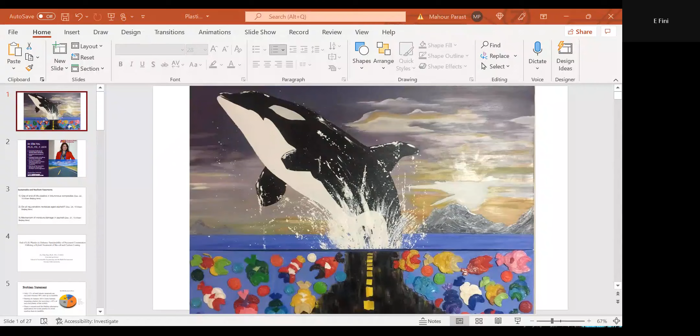I want to talk to you about, as Ali mentioned, waste plastics, what we call waste plastic, and why do we even care about them. So I'm going to start with this art, sort of cover art. It is actually painted by my sister, Elva, who was inspired when she saw all the problems with the plastics in America and everywhere in the world, really.

During this lecture, I'm going to ask a few questions, and I want you to think about it and maybe write your answer in the chat box. So this is not a typical seminar where you listen and, you know, sort of forget about it after a few weeks. I want you to reflect and think about what are the challenges in today's pavement and transportation in general, and as a student, if you are listening, what can be your contribution to address those challenges, whether it's in China or in America or anywhere else in the world. You can make a major impact by realizing and recognizing true big challenges.

So if you think about this art, it is actually showing how this whale is running away, and it's sort of ironic because whales don't have anywhere to go. So imagine if he's running away from the ocean, in a way it means he's gonna die because there is no other place for him except oceans.

And all those little plastics you see there, they are actually representing the plastics that we humans are dumping into the ocean. By 2025, it's estimated that the amount of plastic in the oceans will be equal to the weight of fish. And by 2050, we'll have more plastic than fish.

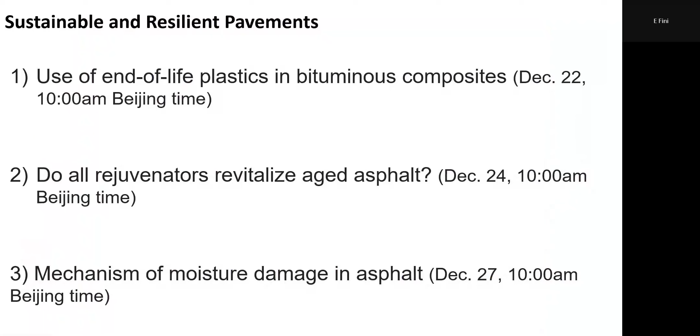So talking about end-of-life plastics, the word is plastics, right? So many of you think of plastics as one entity, but just like humans, like my name is Ellie and Ali's name is Ali, we are different. Plastics are also different. So when you hear plastic, don't generalize them, because every one of them has different characteristics. And I'm going to show you how we deal with them as end-of-life or waste plastic, and is it even possible to use them in pavement?

Here we talk about hybrid coating and some technologies to make plastic like asphalt and go and stay in asphalt. So I'll tell you about the technical side. But to start, think about all the waste plastic that goes to landfill. Right now, we are only recycling 12%, and 40% goes to landfill.

As you guys already know, China is not accepting plastic from America, and you guys are producing a lot of plastic on your own as well. So you end up with a lot of plastic on your side, and we are ending up with a lot of plastic on our side we have to deal with. There is a big need to find alternative solutions, because everybody's talking about this problem and the ocean and the fish dying and the whales dying.

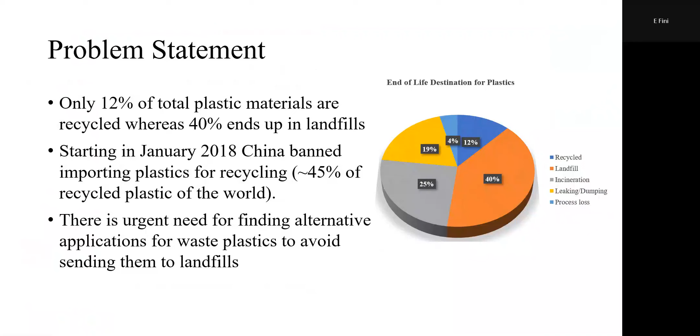But think about it from the material side as well. These are valuable materials. They are made of molecules. These are just called waste because they are in the wrong place at the wrong time. But when you look at it from a material perspective, these are just molecules like any other thing. When you throw out your bottle of water or milk jug after it's finished, it becomes waste. But these are literally polymers and molecules that a lot of energy and effort went into making.

And then you think, okay, I want to recover these molecules. I don't want to dump it in the landfill. Well, some of them are easier to recycle, so not too much energy goes into recovering the monomer.

And I caution every one of you in pavement and transportation, think about how we can improve our roads. Obviously, roads are not the cemetery or burial for waste. We don't want to just dump it into roads because we want to get rid of it. If it has value and if it adds value to pavement, then yes. If it doesn't, we don't want it. First and foremost, we are engineers, we are pavement engineers. We want to make the road last longer, be more sustainable, and work better.

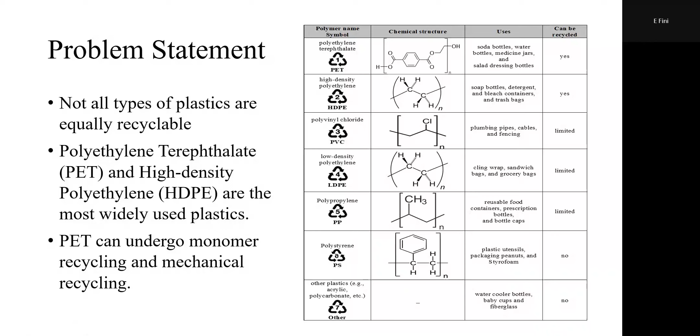By saying kick them out or push them away, I mean compatibility. So when you think about plastic and use of it in asphalt, you have to think about, are they compatible? What is the problem if they don't like each other? They're gonna separate. Over time, they're gonna separate and you're gonna have pavement which is prone to crack because now you are getting phase separation. So I'm gonna show you how we can actually make asphalt and some of this plastic like each other. And this is one method we have done.

I'm sure many other people are working on other methods, but one step is obviously to try to recover monomer, but that's too much energy and it's difficult in terms of carbon footprint and associated energy consumption. So we decided instead of recovering the monomer, we're gonna grind the plastic and then cover its face so the bitumen thinks it's his friend and is compatible. So here is the covering portion, it's coating. Basically, we are covering the plastic's face. You can see these colorful granules, they are different plastics. We grind them to this fine powder here, and then we use the oil to coat the surface.

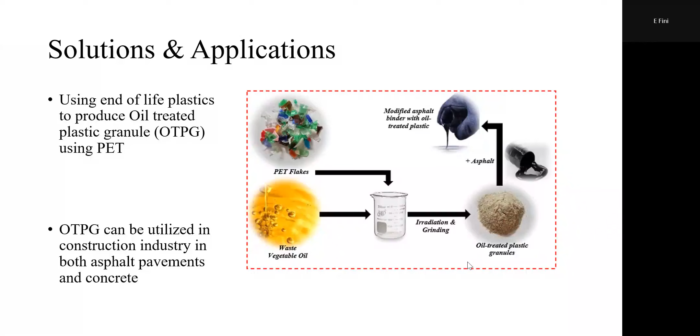You may think why we are coating it with waste vegetable oil. In waste vegetable oil and many other bio oils, we have molecules that can graft or attach to the surface of plastic. So now you have a plastic that doesn't call itself plastic. So then asphalt may like it because it doesn't see that much incompatibility. So we call this oil-treated plastic granules, and that's how it's made. It's a patent pending technology here at Arizona State University, and we're trying to use it in trial road sections here. So thinking about the method, here you can see different pictures of it.

So I'm going to tell you about the tools, but before going to the tools, because some of you are students, I assume, when you face a challenge or you want to start dealing with a big problem, don't worry about the tools. You need to first figure out your research hypothesis, and figure out the true problem, which, in other words, we call the research gap.

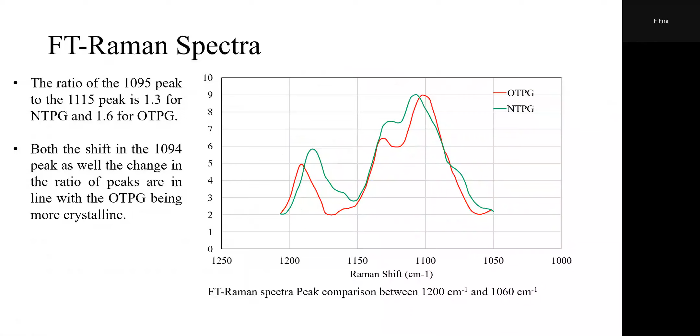So we did another tool here. This one is Raman. So when we run FT-Raman here, the ratio, for all the oil treated, is 1.6. That right there tells you the two of them are different. So two methods to show you that what you have done in terms of changing the phase of plastic worked, even though the color stayed the same.

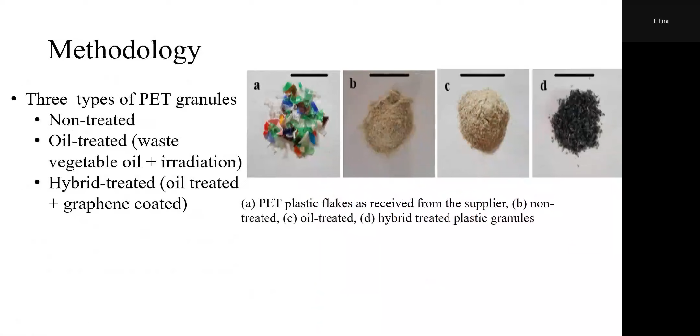So you can see how important it is now, after you know the question, to pick the right tool. But they are still just a tool. If one tool, one method did not work, like here, color did not distinguish, I go with another method. If this one doesn't work, then I go with another method. For now, we have two methods that can distinguish. Good. The next question is, okay, now I see that surface chemistry changed. I have new chemical functional groups appear on the surface after I treated it. Does it mean the surface energy also changed?

So this is right here another tool. We use inverse gas chromatography, and with that, we measure basically surface energy. The non-treated one here had, in terms of dispersive forces, 91 millijoules per square meter. As soon as we treated it, it became 142. So you can see the change in dispersive forces, and of course it reflects in the total, which is increased.

The increase of surface energy promotes interaction with surrounding material. In this case, we're gonna put plastic into bitumen. So increase of surface energy of our new plastic helps it interact with its surrounding, which is bitumen. That's the hypothesis, right? If I increase the surface energy, I grafted this molecule, I'm expecting that the interaction will go up.

The whole reason we wanted to make it compatible, right, to begin with, is we want the interaction to be higher. So in this case, when we went from 91 to 142, that's a significant increase in surface energy. Now we want to know: does it really interact better with its surroundings now that we changed the surface? So with these three tests, we proved that what we did changed the surface, changed the plastic, even though the color did not change. So now let's see if it helps.

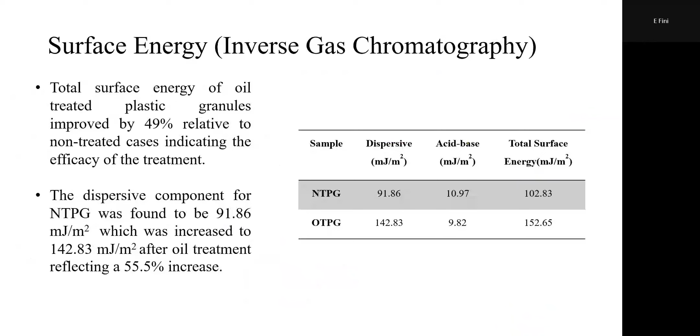And then all these other tests are more or less specification driven. That's why I put ASTM in case you want to do it on your side. So ASTM D4402 is a viscosity test. Most of you are familiar with this. When you add new particles or granules into asphalt, what happens? Viscosity jumps up. In the standard, we only look at the 135 degrees C viscosity. So viscosity at 135 for non-treated was around 2000, and then oil treated and carbon treated were these two bars. So we did reduce the viscosity a bit, but interestingly enough, it shows that with the carbon treatment, it was higher than just oil treated, which may even mean that the interaction on the carbon side was more, because carbon is literally more compatible with bitumen, which itself is carbon based.

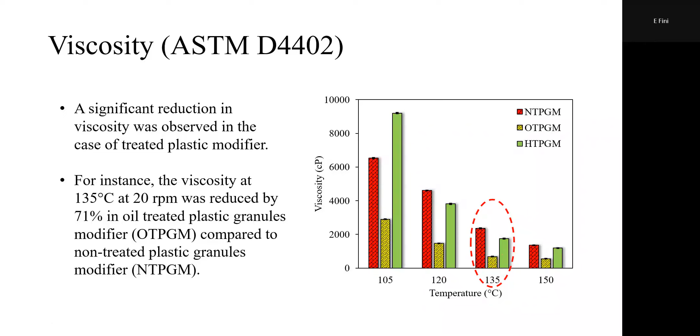Another method to show these materials are different is rheology, or modulus. For those of you not familiar with complex modulus, G star is a measure of resistance to shear. You basically shear the samples using a parallel plate spindle at a certain frequency, and you measure how much resistance it gives to that movement. Here you can see the neat asphalt is the blue here. Neat asphalt, no plastic at all, was right here. As soon as we added each one of these plastics, it jumps up as expected. Think of adding granules or powder into the bitumen, which is liquid. So it becomes stiffer, higher modulus, more resistance to shear.

And in this case, the non-treated one was actually higher resistance right here. When we increased the compatibility, the movement was better. You can see here, the interaction was better, the relative movement was better as well. But that's another test to show you that these three samples are different. They are the exact same grinding size, so particle sizes are exactly the same. The material is coming from exactly the same batch, same plastic, but just by changing the surface properties, you can change the modulus this much.

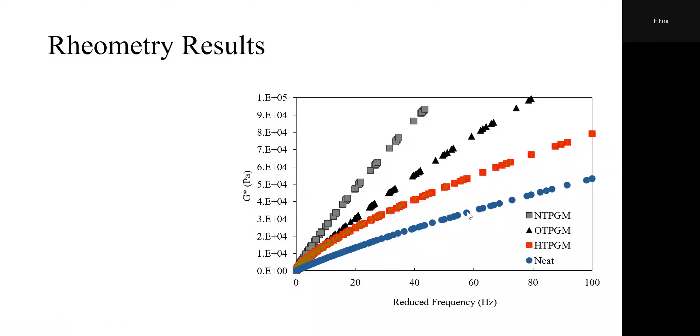And here you can see the factors for fatigue resistance and rutting resistance. These are a standard specification. You can see for the non-treated one here, the red, G* sin delta, which is a sign of fatigue, was 60. And then you can see the numbers reduce much more, which shows improvement in fatigue. They are different, the three of them, but their improvement here is noticeable.

Interestingly enough, the 34 is just asphalt. And you can see that when you add plastic, your fatigue will jump so high. So it doesn't mean by adding plastic just as is without compatibilizing it, you're doing a good thing, because the fatigue could be just lost. And now you're having a material that can be very prone to cracking, fatigue cracking.

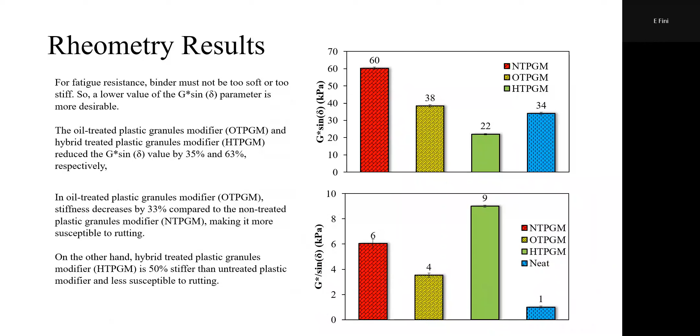And in this case, you have rutting resistance. For the neat, it was low because it's just a bitumen, nothing in it. And when we added this material, it becomes stiffer, so it was higher. And then in case of the carbon, this green one was the highest. Again, another tool, and it shows the changes.

So far, you can see that when you change the surface of something, you are actually changing its behavior. So imagine now, if you have different plastic with different surface properties, of course you will get different performance. So not all plastics are the same. Some could be compatibilized with asphalt. Like here, we showed that this specific plastic could be compatibilized. And we have a series of properties.

Now it's talking about low temperature cracking. So you may have a case that you're improving rutting, fatigue, viscosity, and then it gets to low temperature cracking, you can lose it there. If it's not improving, then you still cannot use it, because we have a bunch of specification thresholds for low temperature cracking. As you know, with stiffness and M value, we have to meet those as well.

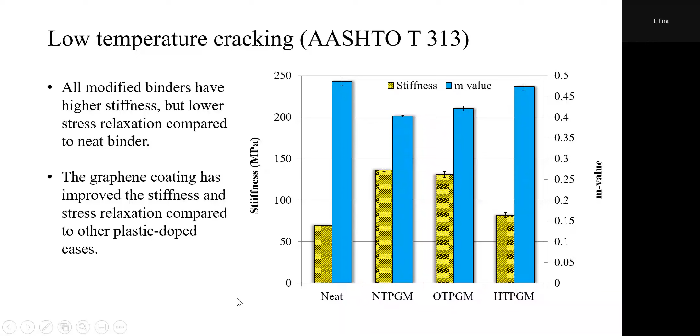So for low temperature cracking, when the material is at very low temperature, sub-zero, and is very stiff, that means it's prone to cracking. In this case, you can see the neat, and then when we add the compatibilized plastic, these three. Same thing with M value. So M value is the vertical axis on the right. You can see the change of M value here. According to a standard specification, the stiffness has to be below 300 and M value has to be more than 0.3. So anything less than that, it will be failing.

So after you even meet all those specification criteria, you have to worry about how your material will age over time. Some materials may be very good at the beginning, but as soon as you expose them to one or two cycles of aging, they will just degrade really badly. So we have to look at the aging, and I caution you again when we talk about rejuvenation later on: when you improve a property at the unaged status, you're not done. You have to look at the aging trajectory of this material, because it could be really bad after several years, and you don't change the asphalt every year. You're designing for many years.

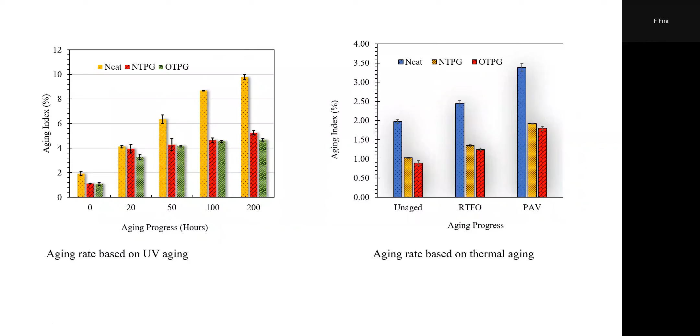So this was actually much more interesting to us than all the rutting and fatigue and all these other characteristics, even though we have to meet those, right? If you don't, then you can't even use it on the road. But the most interesting part to us was this aging. What does it do to delay aging so much?

So we had to do a bit of molecular modeling. I'm not going to go too much into the chemistry. For those of you who are interested, I'll refer you to the paper that we published on this. But think about all the molecules of the oil, which we put on the face of the plastic. These are the molecules. And this one here on the left is the plastic.

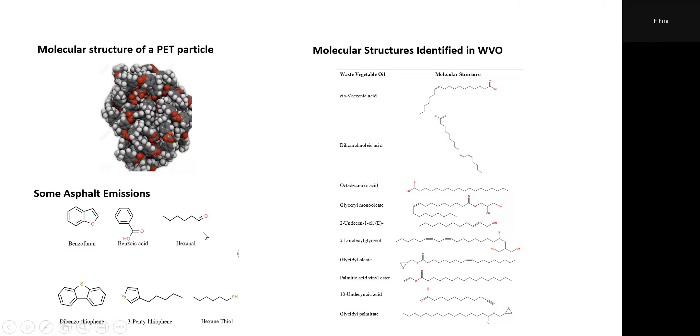Well, one reason is oxidation, which we always look at. But another reason is some of the components in asphalt are going to the air as volatiles. So they're gone, they're lost. And that contributes to aging. So as more and more compounds which are supposed to be inside asphalt go out, they leave the asphalt weaker. As a result, it becomes more prone to cracks and degradation.

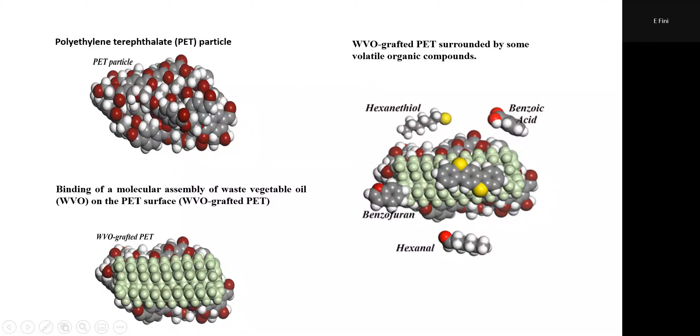So what happened here with asphalt is that when we have this plastic, it keeps them in because of a good interaction between them. It doesn't let them evaporate or emit to air.

So in summary, when you use a new material, a recycled material, whether it's plastic like we just talked about, or any other so-called waste, you need to figure out if they are compatible. That's the very first step. And then if it's not compatible, the second question is, can it be compatibilized? Can it be made compatible by doing something to it?

So in this case, treatment of plastic, here polyethylene terephthalate, PET, actually improved compatibility. We have a Raman test to show we increased crystallinity. The surface energy was increased by 49%. In addition to that, we had significant reduction in separation, which proves that they like each other more.

They're not 100%, they're not gonna love each other, but they like each other. So that's better than none. And then hybrid treatment, when we added carbon on top, that was even better because when graphene coating happens onto the plastic, it is very compatible with asphalt, which is carbon-based itself, and it improves crack resistance. And overall, introduction of this plastic, either way, even the non-compatibilized one, still improves aging. It's just not compatible, so it's gonna crack.

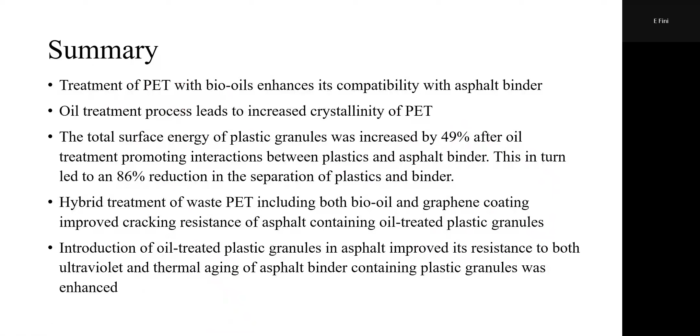Thank you so much, Dr. Fini, for a very excellent and informative presentation, and we learned many new things. Thank you about using plastics, and not just using plastic, but using the right plastic material and adding it to the asphalt as a modifier, making more sustainable material. And of course, it helps asphalt material be more resistant to different circumstances during the service of the asphalt pavement, etc. So it's a very interesting topic, and this area is now developing. I hope all attendees enjoyed listening and seeing these findings and results.

Thank you so much. Yeah, I got several questions till now. Yeah, 3 questions from... thermoreversible aging or physical hardening of modified asphalt. One question was about that.